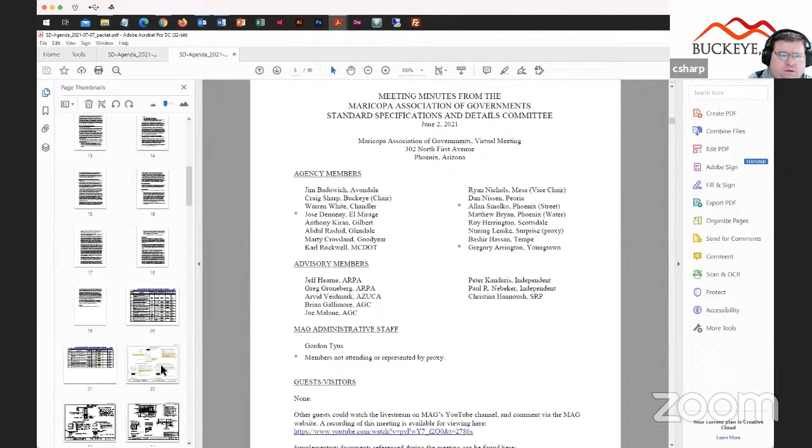Okay. So yeah, so far we've just got a couple of grammatical errors, some items for guardrail and meter vault cover revision. So if nothing else is there, we'll just move on. Item number 5, update to detail 212, the utility pothole repair. If I remember my emails correctly, I don't think Arvid was going to be here. He had a doctor's appointment. I think he is here now. I saw him in the list. Okay, Arvid, are you on? Yeah, I'm here. You are, okay. Do you want to talk about this?

Sure. So we've got in front of you the MAG 212 revision that's gone through the working committee and been passed around to various agencies for review. And so it now completes the desire to have a temporary pothole requirement, and then also the 212 detail for the permanent replacing and repairing of a utility pothole. And again, the temporary is going to be limited to primarily construction time, and then anything else to be a MAG 212 permanent detail to repair the asphalt if we're doing SUE work.

Okay. Jim, did I miss anything? Yeah, I think we also routed it to the AUCC. Isn't that right, Dan? We didn't get any comments back from them. That is correct. Say that again, I lost you. So Dan ran it through the AUCC committee, and we didn't get any comments back. Yes, that's correct. Thank you. I forgot about that. I think we did a good job here. Yes, I agree. I feel it's been very well vetted.

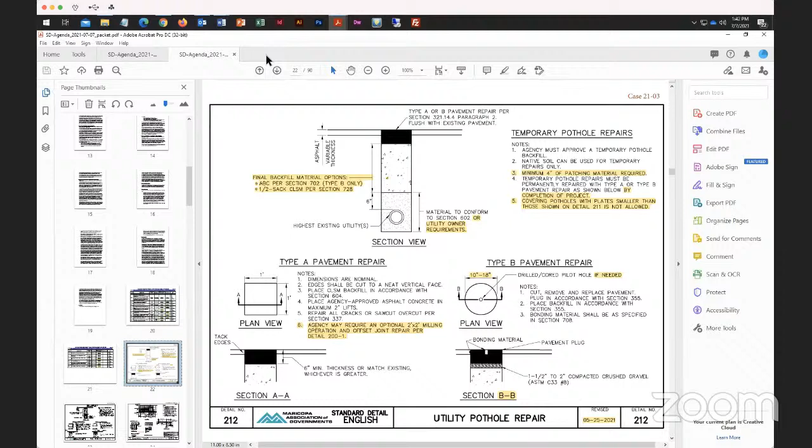Can I get a motion? Yeah, this is Karl. I'll make a motion to approve the detail change, 212. Thank you, Karl. And a second? Buckeye will second it. So we'll go through a roll call vote here.

Here we go. Avondale? Yes. Buckeye is a yes. Chandler? Not present. El Mirage was not present. Gilbert? Yes. Glendale? Yes. Goodyear? Yes. Maricopa County? Yes. Mesa? Yes. Peoria? Yes. Phoenix? Al Smolko, yes. Thank you. Scottsdale? Not present. Surprise? Yes. Tempe? Yes. And Youngtown? Not present.

Okay. Case 2103, the updated utility pothole repair detail 212, passes with a majority of yeses. Moving on. Thanks, everybody. Thank you, Arvid. Yeah, thank you guys. Appreciate it. It was good working on it. We'll try and find another one to get started on now.

All righty. Well, moving on to item number 6. It's proposed details, case 2105, proposed detail 529-1 and -2. It's a curb opening catch basin detail, City of Phoenix P1569. So this is one that I'm bringing up; basically this is what the City of Buckeye uses for all of our catch basins. City of Phoenix has used it forever and ever.

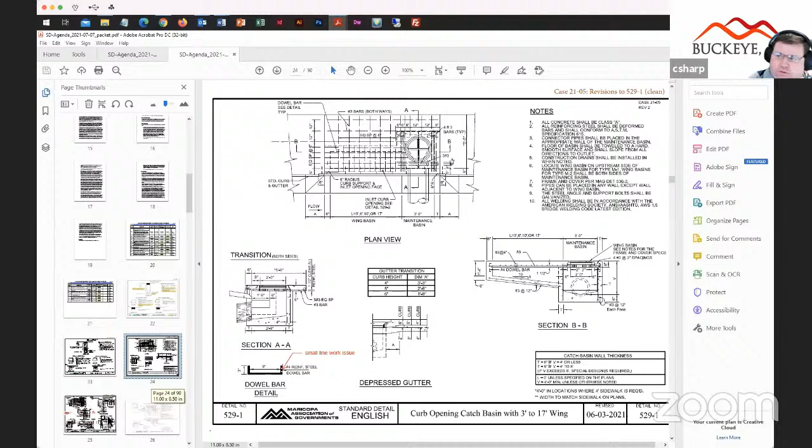When we first proposed this, the county had some comments on adding some reinforcing and revising some line work, which is what you'll see in the drawing in front of you, and we cleaned up some of the dimensioning on there. So those are some of the changes. If you can go to the next one, Gordon. When I was looking at it, I was finding some things on the original drawing that probably need to be cleaned up down in section AA. It looks like it's dimensioning from finish grade to the bottom of the deck.

Looks like that should be a total of 8¼ inches with a 6-inch top and 2 inches of material native over top of that, with 1.5 inches of clearance from the top of the concrete down to the reinforcing.

That's just section AA. The access frame and cover, the little hook that's actually shown that's welded on the frame itself. I talked to a few foundries and they don't do that at all. It's not even manufactured like that. Not quite sure why that was there to begin with. If anybody has any insight, I'm definitely open to understand what that would be there for. But when the frame is actually installed, there's concrete poured all the way around it, so it's not going anywhere.

Go ahead. Yeah, I have a comment on the access frame and cover section there. I just added it in because it actually shows on the City of Phoenix detail, but it wasn't on the one maybe you had started with and that we were working on. But yeah, if they're not using it, it looks like it's a field thing too. They show a 3/16 weld of a piece of rebar, so it's not like it comes from the foundry that way. And I assume it's meant to anchor that frame into the concrete, so it couldn't be lifted out, or it wouldn't jump out of there with a heavy wheel load or something else.

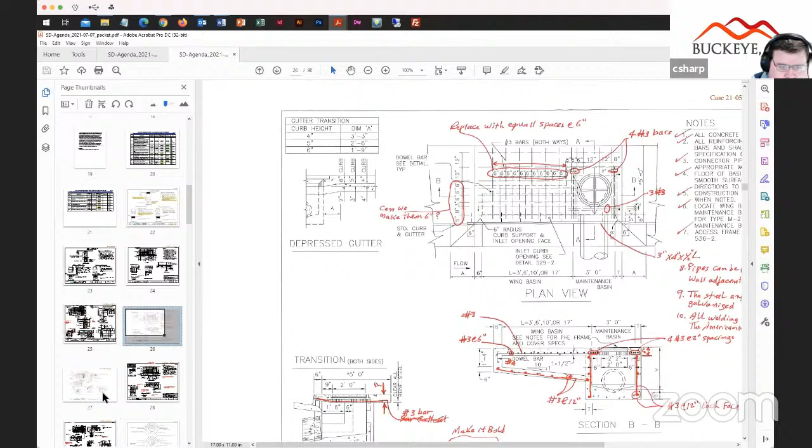Right. Gordon, can you pull up the City of Phoenix detail? Or you may not have it. I don't think I changed that when I did ours, so if it's going to be on the City of Phoenix detail, it'll be on ours as well. Okay, so it'll be on here somewhere. Yeah, there it goes. See where it says finish grade down lower left corner? Yeah, and there too. It looks like there's a little piece of grass and soil right up against the frame. I don't think we want that. Yeah, and I don't think it's actually built like that either. I believe there's concrete that's cast all the way around.

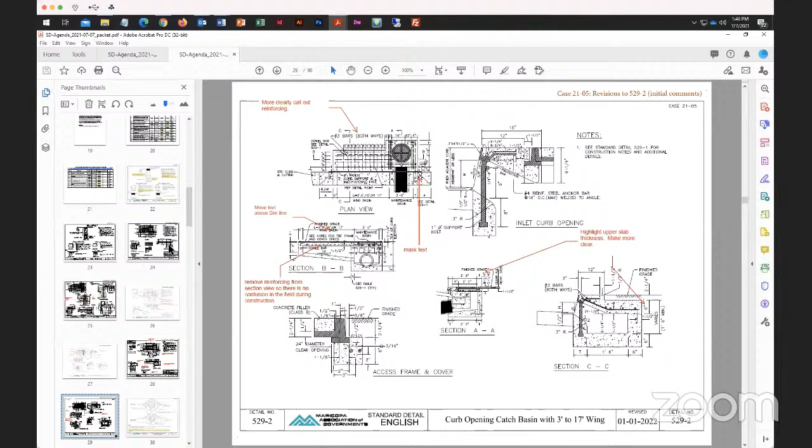In fact, if you look up in the plan view directly above that, you have that T dimension, and that's going to be all concrete. Okay. Yeah, I'm not sure why it showed that on both the section AA and the access frame and cover. It kind of looks like soil right up against it. Yeah, agreed, I think that was a good change. So that was all I really saw on this, minus maybe scaling back some of the hatching. It just looked kind of dark. Other than that, Karl, your guys did a very good job. Thank you for the help on that.

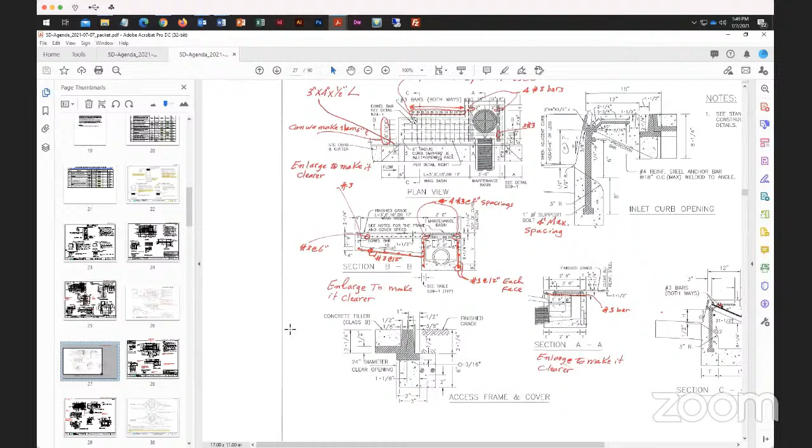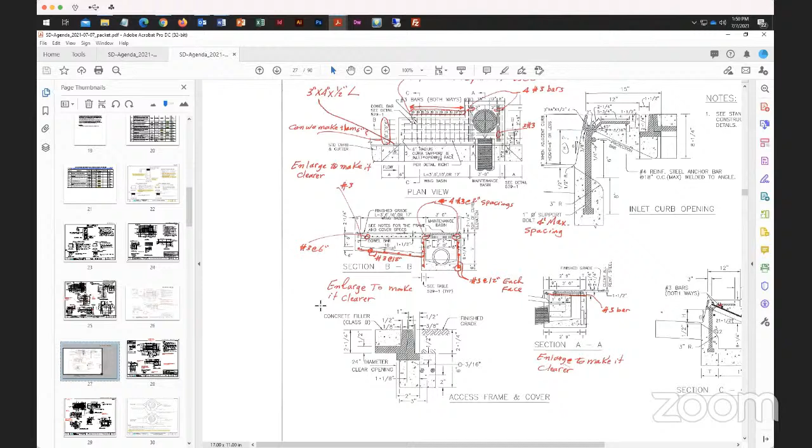If you go down to the ones that our structural engineer marked up, Gordon, I was going to cloud my detail, but I didn't. If you see section B-B, we've added rebar into the bottom of the wing and in some of the walls there, which I think is maybe conservative, but there could be a case where you have poor soil conditions or washouts where you want structural support of the wing there. That's really the only structural change. Everything else is a little more clarity, calling out some of the bars that might not be obvious, a little bit cleaner way of dimensioning. Okay.

So that was the gist of this case, basically taking the City of Phoenix detail and throwing a MAG border around it. I got our thing to you guys about a week ago, so some of you may not have taken a good look at this. I don't think at this point we want to try and vote on it, but maybe by next month we could talk about it at the working group too. I think that's good, this is a good step. So does anybody see anything? Any comments, concerns?

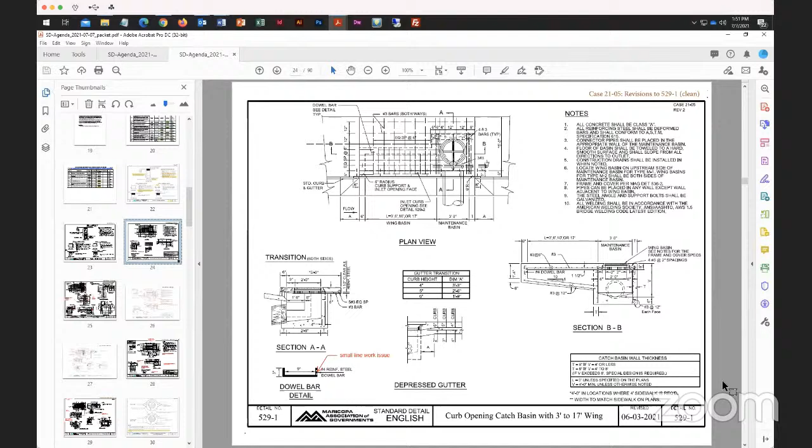One other thing, when you make the updates, you might want to make the text in the title block the same as the second drawing instead of this Roman. Okay. Oh, by the way, Carl, can you send me that CAD file and I can take it from here? You guys did the bulk of the work. I really appreciate that. We're working in MicroStation, so we can't get exact MAG drafting standards when it comes to some of those things. So yeah, we'd be happy to send you the CAD files. Perfect. Thank you very much.

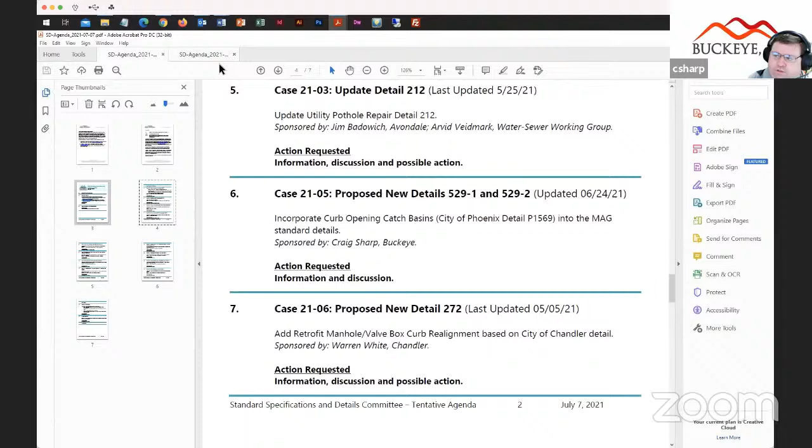Okay, not hearing any other comments on 2105. If we can move down to item number 7, it's case 2106. It's the proposed new detail 272 retrofit manhole valve box realignment based on the City of Chandler detail. Warren, you've got this one?

Thanks, Craig. Hello, everyone. As Craig mentioned, this is a new detail for retrofitting manholes or valves in curbs, whether it's an outer curb or the median curb. And really haven't had too many comments in a couple months. This has been discussed in the water sewer working group. Unless there is anything new or anything to discuss now, I'd move to accept the case as presented. Yeah, and it's definitely up for action. So, is there any other comments on this?

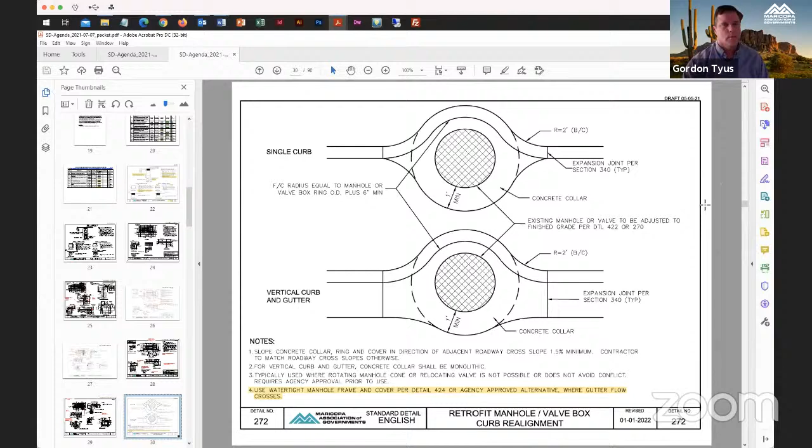Not hearing any, Warren. Can I get a motion? I'll motion. Thank you, Jim. Can I get a second? Second. I'll second. Thank you, Dan. Okay, Avondale. Yes. Buckeye is a yes. Chandler. Yes. Thank you. El Mirage is not present. Gilbert. Yes. Sorry about that. Oh, you're good.

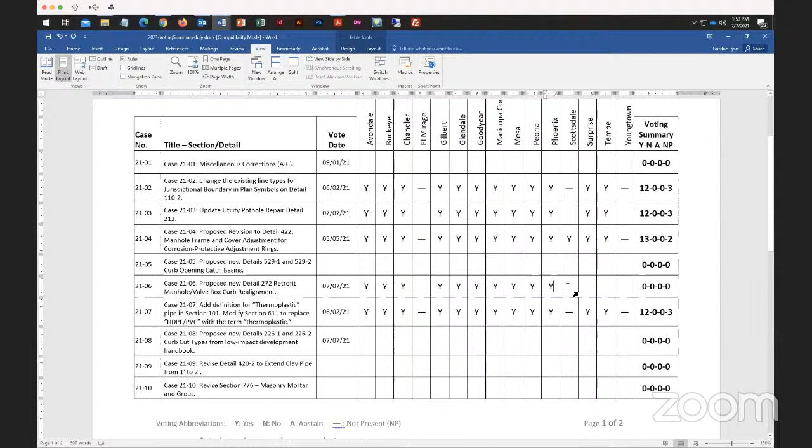Thank you. Glendale. Yes. Goodyear. Yes. Maricopa County. Yes. Mesa. Yes. Peoria. Yes. Phoenix. Al Smolko, yes. Thank you. Scottsdale. Not present. Surprise. Yes. Tempe. Yes. And Youngtown. Not present. All righty. Motion carries. Case 2106, Detail 272 is approved. Thank you, everybody. Yes, thank you. Thank you, Warren. That was excellent.

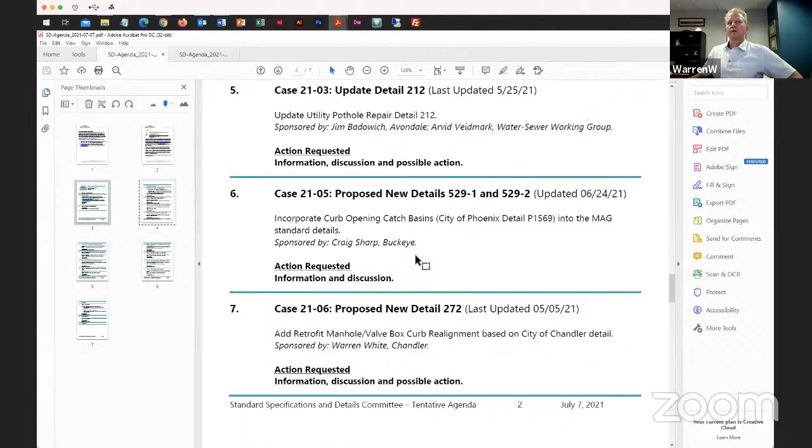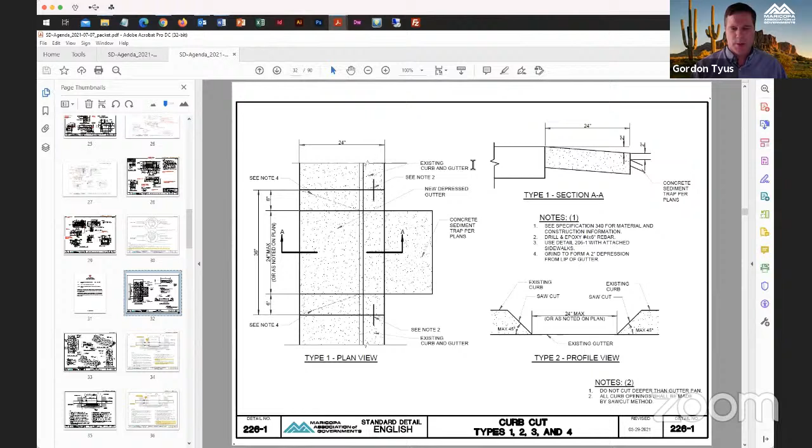So if we can move on to item number 8, case 2108, proposed new curb cut details. These are the 226-1, 226-2 for the low impact development that the outside of right-of-way working group is working on. Alan, are you sponsoring this one? Yes. We did this with Keith. Okay. Do you have any updates, or is this basically the same as we had the last time? Got the right one there? Yeah, Keith sent me an update that just fixed a few typographic issues. Oh, okay. It looks different, that's all. Yeah, I had no comments on this. Okay. Anybody else have any comments?

Hey, Alan, this is Warren. I had one question internally, and maybe it's accounted for here: if we had a roll curb situation, is there anything that we note as a transition or anything in that case? Use this in a roll curb? I'm not sure about that, but if you look at type 2 profile where it goes down, it seems like if you had a roll curb, it would be not a straight line. It'd kind of follow. I don't think it's detailed like that, but I don't see any objections to a roll curb.

I would wonder, assuming that in areas where you're going to have 6-inch curb, you're going to have drainage issues. And typically where you've got vertical curb, you're on a more major road, where local roads are typically the only thing that has roll curb. I don't know if that would be the case. Yeah, probably. Then you have to look at, my cursor doesn't work on the screen here, but where you've got that vertical curb and that transition where you just go down on the slope, you'd almost want to do that almost like a radius or something.

So depending on your sections or how you pour the roll curb, it may be a different transition that wouldn't look good. So you wouldn't want to do it on a radius. You just kind of flatten it, you know. I would almost think that would be a separate detail. You'd want to look at something before you let a contractor go on it. Yeah, because that's going to change quite a bit of what's drawn here.

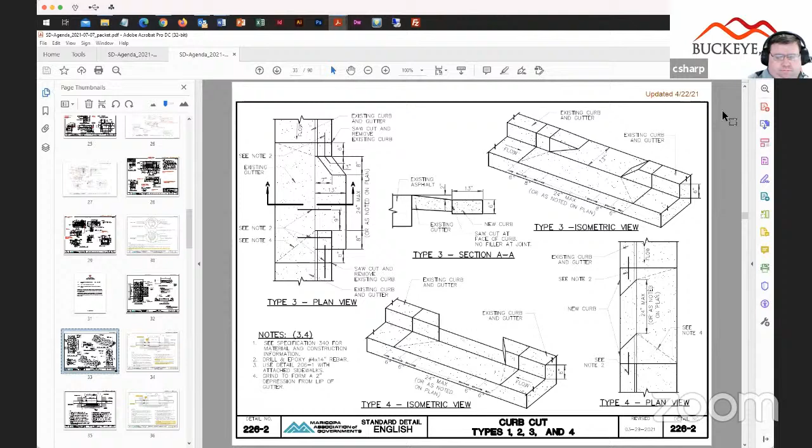Again, why these don't need to be that efficient. It's just going to be a little bit of drainage. It's nuisance drainage more that goes into these. I think I'd agree. I've been looking at these details and I'm seeing 4 different types, which seems like it might be a little bit of overkill on what we're trying to accomplish here.

And when I look at each of these, type 4 seems to be the one that makes the least amount of sense from a long-term maintenance standpoint. I agree we're going to end up with curbs that are going to have issues being broken, fractured off, whatnot. And from an efficiency standpoint, I don't know that really provides you any more efficiency than the type 2 detail. I don't know that there's any more efficiency to that.

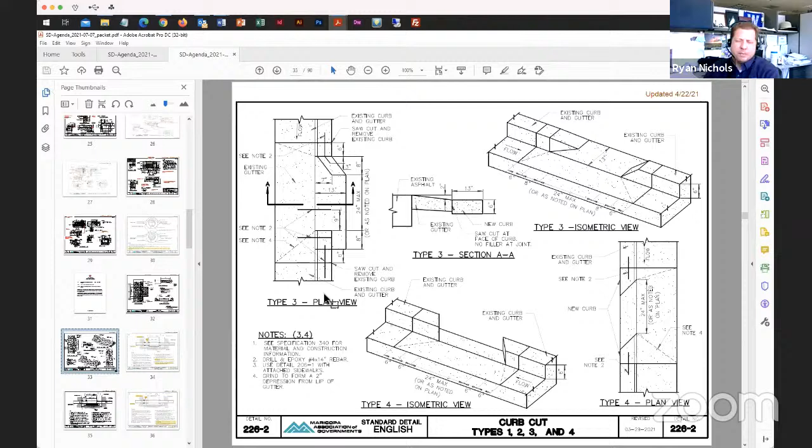I would agree. Yeah, I'm a little curious about type 1 versus type 2. Are they the same type? I'm just looking at the profile view of type 1. Looks like type 1 doesn't have the actual curb. To me, it just looks like it's gutter, where the type 2's got a gutter to it, if I'm looking at that right.

No, there's a curb there. But I'm not seeing the difference. That's what I'm trying to figure out. Is it? I thought maybe it's just a type 1 profile view as opposed to a new type.

See, I do think these details could use a little more refinement. When I look at type 1, referring to note 4 there in the notes section, it notes to grind to form a 2-inch depression from lip of gutter. So to me, type 1 involves a little bit more work where you're depressing the gutter, which will increase the efficiency of the capture. Whereas type 2, the detail's pretty limited in what it shows, but I've interpreted that as a curb and gutter where the curb just terminates.

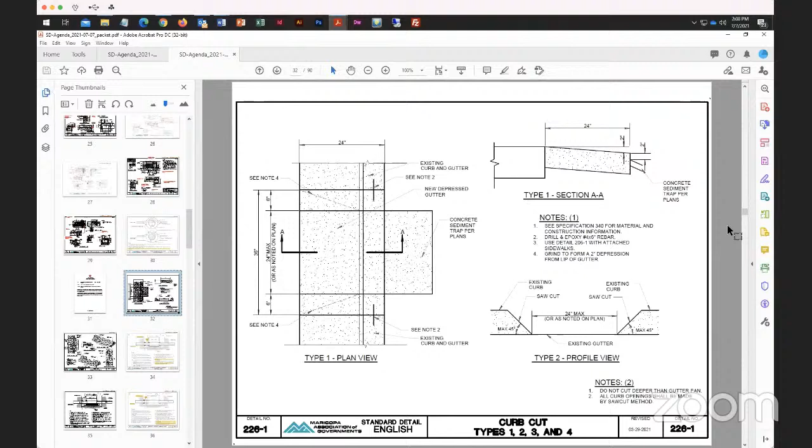Yeah, Peter, I'm taking notes also, and I'll send something up to Keith. And we also will have this meeting posted on YouTube if you want to review the comments that were made now. Okay, thanks. Any other comments on this?

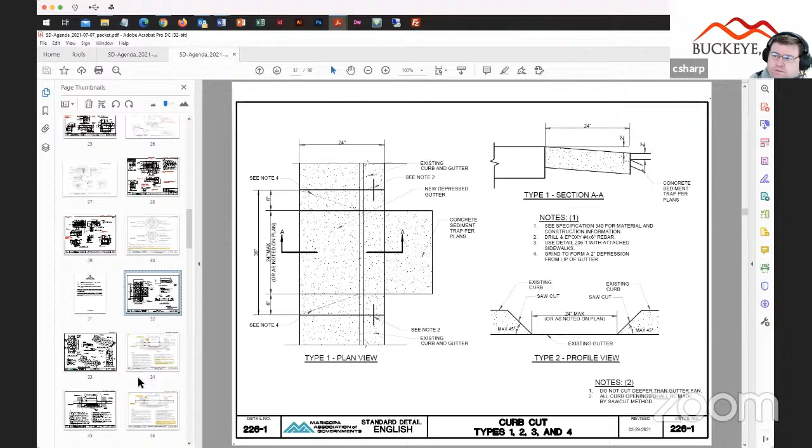Not hearing any. If we can move on to item number 9. Case 2109. That's revising details 419-2, the polymer, and 420-2, the precast manhole bases. Showing the longer pup coming out of the manhole, just to avoid conflicts.

Matt, do you want to take this? Or is Matt on the line? Yeah, I'm here. Can you hear me? Oh, there you are. There you go. Yes. Yeah, everything on our end looks good. I like what I'm seeing. I don't know if there was anything that you had, but I think everything up to this point looks very good.

Yeah, and just kind of for everybody, we had the president of the Clay Pipe Association come through, and he was actually the one that redlined this and made some of the changes. So this is all basically out of the NCPI manual. I wanted to mention also that 420-2 was the one that you saw last month. And the only change to that one was during the working group meeting. I think Jim suggested making 24 inches kind of the minimum distance here, because there wasn't a minimum. And without any minimum, you might have the same problem where you had the interference before. So that was added to this one.

But the other issue that the guy from the Clay Pipe Association brought up was that this other detail 419-2 for the polymer manhole base basically would need the same changes made. And so that's what these marked up things are, basically the same changes for the polymer base. Okay. So sounds good. Any other comments, questions? Thank you for all your help on that one, Gordon, too. Thank you. Sure.

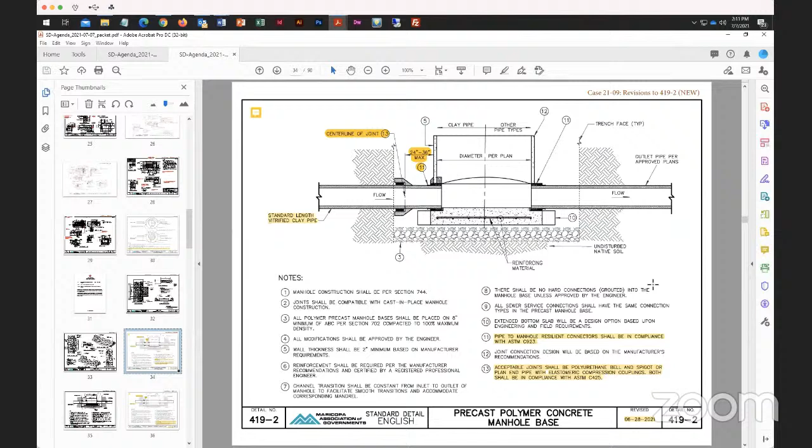It specifically says to use vitrified clay pipe. Is that the only pipe that everyone's using? So the intent of this is, if you look at the top of the manhole there, we've got one side showing clay pipe and the other side showing other pipe types. Being that clay is a little bit more finicky, we've got to do a couple extra things for that. But we did try to break it out so it was clear as to clay and anything other than clay. Thank you. Excellent question. Any other questions?

So Matt, I don't want to speak for you, but since we're not really hearing anything, we've gone through this a couple of times, through the working group a couple of times. You want to set it up for action for next month? That sounds great. I think it's ready to go. I agree with that. So yeah, Gordon, if we can put this on the agenda next time for action. Okay. So, but thank you, Matt. Excellent work. Thank you as well, Craig and Gordon.

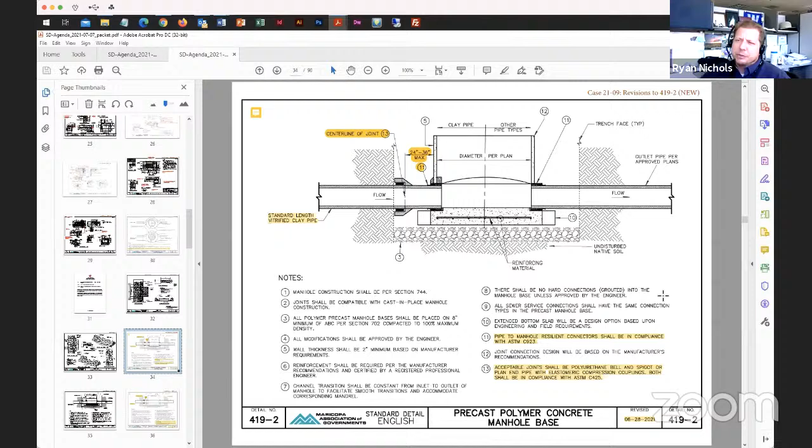Craig, is the only change on this on the vitrified clay pipe side? There's no other changes to this detail? That's correct. And I don't know if Gordon can kind of hover over the joint for the clay pipe. That was the biggest problem. If you notice how the joint descends below what that anti-flotation ring is right there. So what we had on there before is a 1 foot. So with 8-inch pipe, we didn't have this issue, but anytime you got any larger diameter pipe, the outside diameter of that bell was in conflict with that anti-flotation ring.

Right. So talking with NCPI, they were like, hey, we can go up to 36 inches. We just have to have 2 points of flexibility within 36 inches. So the boot at the manhole being one and the joint within 3 feet being the other. So we meet all of their standards, and that actually solved the issue with the conflicts with the anti-flotation ring. There was one other change that he made, correcting some of the references to ASTMs. If you look at note 11 here and here, it's both pointing to the joints or the resilient connectors. So this was corrected for both sides. Yeah. Okay. Thank you.

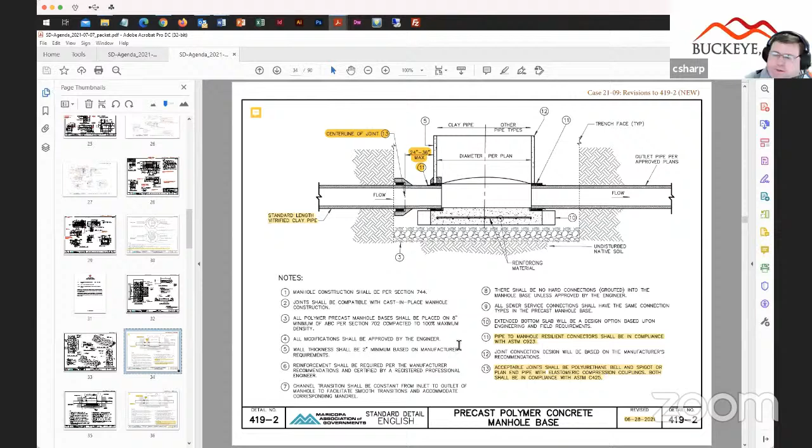Well, if there's no other questions, we can move on to item number 10. That'd be case 2110, revising section 776, the masonry mortar and grout. Update allows commercial ready mixed grout and factory pre-blended options, rewording of the cementitious materials, and ASTM updates. Jeff, are you on? I am. Take it away. I've gotten no comments, Craig. Okay. Unless anyone has any other comments, I'd like to put it up for a vote in August. Are there any other comments out there?

Not hearing any. I think we can definitely do that. Put that up for action next month. Great. Thank you very much. Thank you, Jeff.

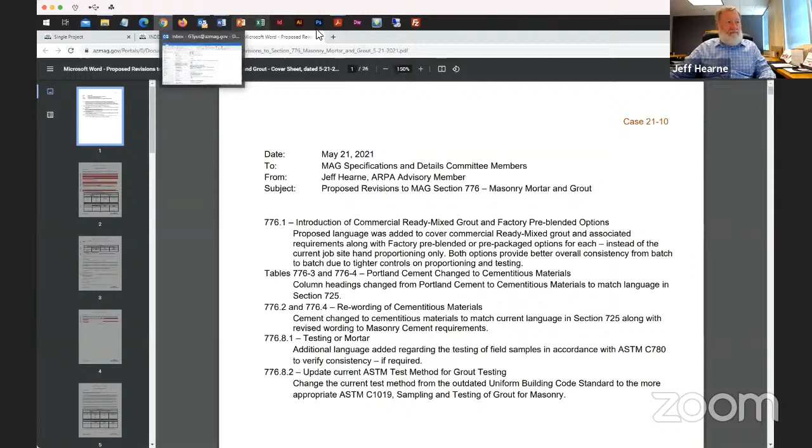All right, moving on. Item number 11, case 21-11, revising section 611 to add requirements for potable water hauling. I know that the water and sewer working group has been working on this for a while. Addition of potable water hauling requirements, adding sections from the AAC statute. Jim?

Yeah, I haven't had time to revise this. I'm going to try to get something for the working group this month. So. Okay. I just got to sort out what specs are being referenced and make sure everything lines up with what the AAC says, and then this other environmental health code says. So. Right. Okay. Anybody else have any comments or questions on it? Okay. Well, look forward to working on this in the working group. Thank you, Jim.

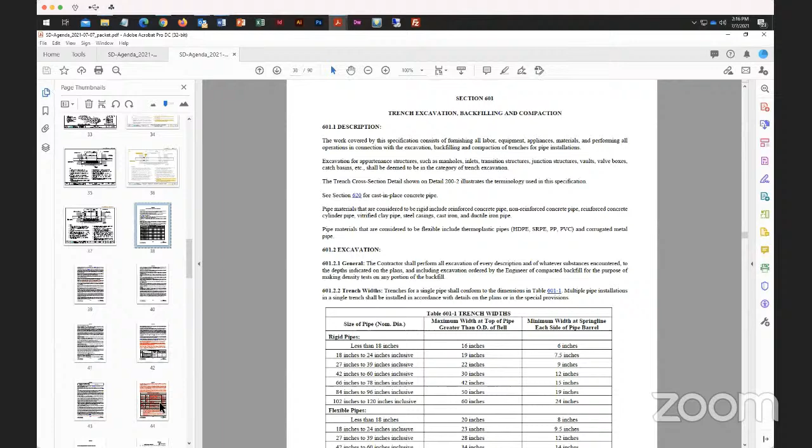Moving on to item number 12. Case 21-12, revised section 601 to add minimum testing frequencies. Summarizing just testing frequencies for trenching compaction testing. Jim, this is yours too, but I believe Rob was the one handling it, right? Is he on? Yeah, he's on. We didn't do too many, just did some small revisions, I think, right, Rob? That's about it. Yeah, that's correct. There's not many changes since the table. In fact, nothing's been changed on the table for a while.

It was some potholing language that Rob Duvall of Phoenix wanted to add, so he's piggybacked onto us. And after talking to some other people about the potholing language, I kind of took everyone's comments, and that's what you see just above the table with the potholing. This kind of meets the intent about who chooses locations and when it's done. Okay. And I put a little bit in there above that, just about where this foundation is scarified, just the contractor to go back and compact it.

And I talked to somebody from one of the private labs and figured that would probably be enough, just having someone go back to compact the foundation without getting lost in the weeds about what kind of compaction you bring it to, or if you go back in there and test it. It's difficult because the moisture may not be there, and it could open up a can of worms. So it's kind of just a methodology to have the contractor, if they over excavate or if they scarify, just go back and compact it and leave it at that.

And the other thing is bedding, too, in here. Bedding was always kind of thought it could be clarified at first. Looking at the bedding information in here, I think it's best to leave it like it is for now. Okay. There was one thing we did is clarify this over excavation. It was unclear what's considered over excavation.

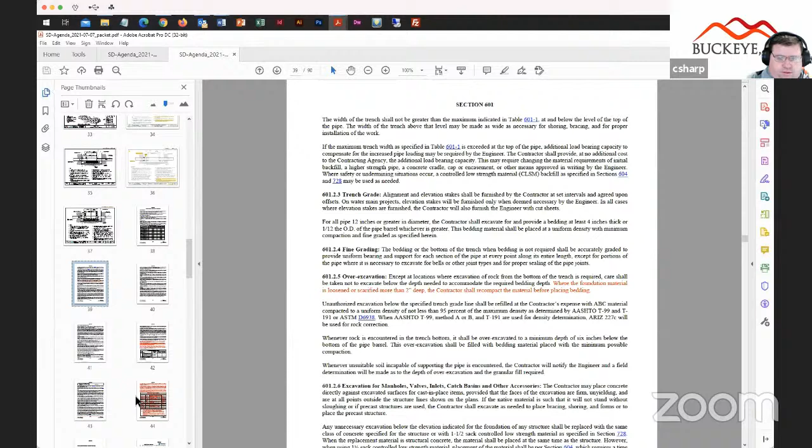I just thought it might make sense to have something in there so that we, as an inspector, could point that out if we saw it. Yeah, that's good to be able to say, hey, you're loosening it up, just tighten it up a little bit. There's not really a requirement, just saying make it flat and tighten it up. Nope. Yeah, exactly. Yeah, this is Warren. I agree. That's a great addition, Rob.

Good. Well, we've just seen some really sloppy excavation, to be honest with you, and we need to address that. Some of these guys are over excavating, and so then it comes down to the inspector interpreting, well, maybe you need to bring in ABC. So this way, we just wanted to clean it up a bit. No, this is good.

Well, this is Peter, the anal geotechnical engineer, looking at this going, do you want to include moisture condition or moisten? Of the foundation? Well, just the idea where you're going to recompact. I hate seeing dust recompacted dry. Yeah. And that's kind of what I was thinking. If you have them go back and compact it, and if you spell out a certain compaction, native compaction is like 85%. They can get that, but if we start processing it and then we're getting testing, it would.

I didn't want to get too deep in the weeds with it, but I know what you're saying, Peter. I agree. You're compacting dry material, but at least there's some kind of effort to do something. Yeah, I grab that. I didn't know if you want to add just the language, shall moisten and recompact. That's a good point about moistening it. Yeah, don't even have to go to moisture conditioning, just moisten. Just get some water in there.

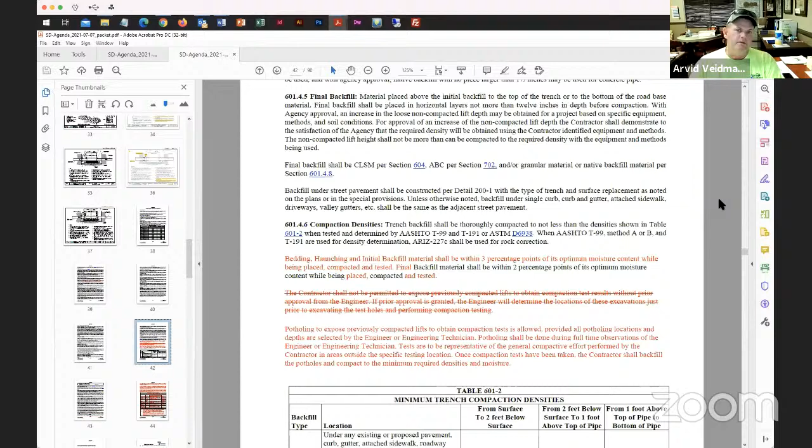Yes, and all I'm saying is in today's world, the word potholing is more broadly used and accepted, and it defines a methodology. So if you change potholing to test pits, then somewhere in there just make sure you add the phrase no hydro excavating will be allowed. Okay. That way you're completely covered and nobody can say, well, why can't I use my hydro truck? Yeah, maybe we can make it excavating test pits and use the 2 terms interchangeably to clarify it. I've never had anyone that I can recall trying to use any other method to provide a pothole to test compaction, but I guess it could happen.

Well, when it does happen, you'll be ready for it. Yeah. That's the whole point. They're going to say, well, MAG doesn't say. Exactly. And you're like, no, it does. I wrote it myself. That's a good point. I'm glad you mentioned that about no hydro.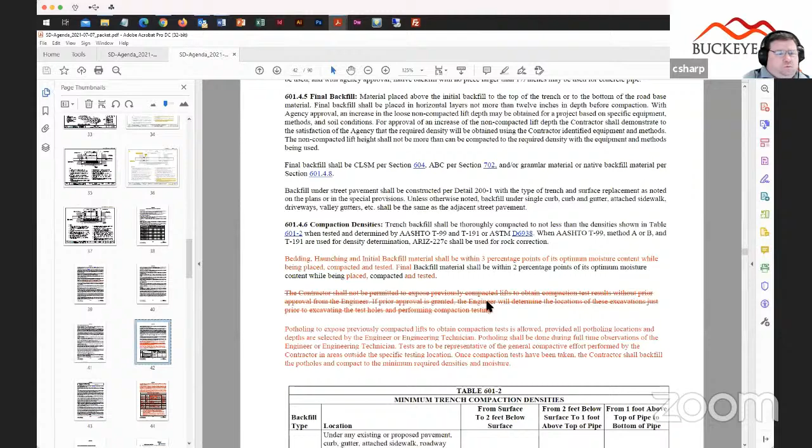Just no hydro. No hydro excavating. Excavating. Okay. Yeah, no hydro excavating. And then you've crossed the T's and dotted the I's and you're done. So if we called it a mechanically excavated test hole. There you go. That even narrows it down even better. So we're not saying, okay, you can't use an air lance, you can't use a water lance. You are going to use something that is mechanical to excavate. Sounds like a winner. Okay.

Rob, this is Peter. I just sent you some language that we've used for some other specs. I just emailed it to you. Maybe that'll help. Oh, excellent. Thank you. Sure. This is an amalgam of 4 or 5 people's comments. So it's a combination. This will be good to clarify it. Good dialogue, though. All right, yeah, Rob, so let's get that revised for the next working group meeting.

And I don't know, any other comments? I know we vetted it pretty good. We had pretty good response from everybody, so. And what's nice with this one, Jim, is, you know, we've also created somewhat of a semi working group for this case specifically, and we've got industry involved, and Rob's doing a fantastic job on all this. So, I mean, this is a culmination of a huge amount of data. Yeah. Yeah, no, it's good.

It creates a baseline. That's the thing, is that there wasn't really a baseline for either the consultants, you know, to prepare their bids. And so this kind of just gives an idea of, you know, we get some baseline for testing. Yes. Again, you know, it depends. Depends on the material, depends on the circumstances, depends on the contractor. You know, it can be varied a little bit, and that's what the inspector can do. But you got to have a baseline. And that was really what drove the start of this, is that we need a starting point.

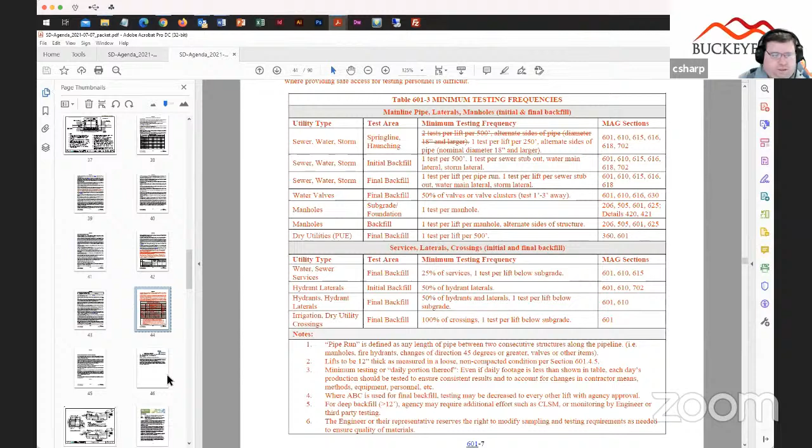It's also been run through 2 of the working groups, in addition to the subgroup that was working on it. So yeah, so it's got a lot of vetting. Yes. Yeah. I've gotten feedback in each group, which is really good. It means it's come a long ways, definitely. And very needed. So I don't see anybody else. Any other comments?

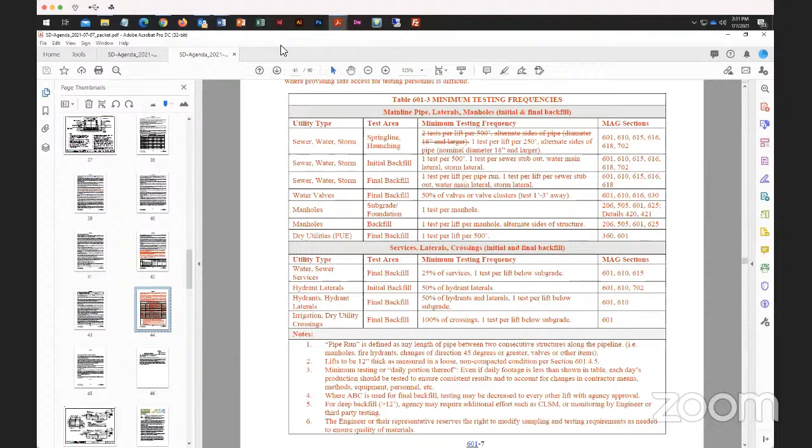Jim, this is Brian. I got a few comments from contractors that I need to get to you. The first one is just above the table, if whoever's controlling it can scroll up. They called for the backfill of deep trenches, the engineer may require additional measures such as the use of CLSM or full-time monitoring of compactive effort. I'm getting comments in regards to the engineer having that ability, and how does a contractor bid that at the engineer's discretion or reserves the right?

Well, it's come out of some situations I've seen way back in the past where we've had settlement for some really deep backfills, and the city I was with at the time didn't have the money to afford full-time observation. They actually had someone maybe 20 hours a week observing the backfill, and it was a major issue with settlement later. I think they still have settlement issues 15 years later. And now we've had a situation where we got our project, 22 feet deep of backfill, and every time I pulled up, I had some concerns about the backfill methods, and I could not require the lab to be there full time. And it's harder to get some safety shoring for someone to get in there and test that deep.

So I think it'd be good for agencies to have the ability to require a full-time observation, or maybe slurry deeper sections. So it's kind of in there as something that I think agencies should have the ability to do. Well, I see Brian's point though too, from a contractor's perspective. So if we took that out and we just said, well, you got to follow the table, then what are they going to do for the deep stuff? They're going to have to provide shoring and get people in there safely then.

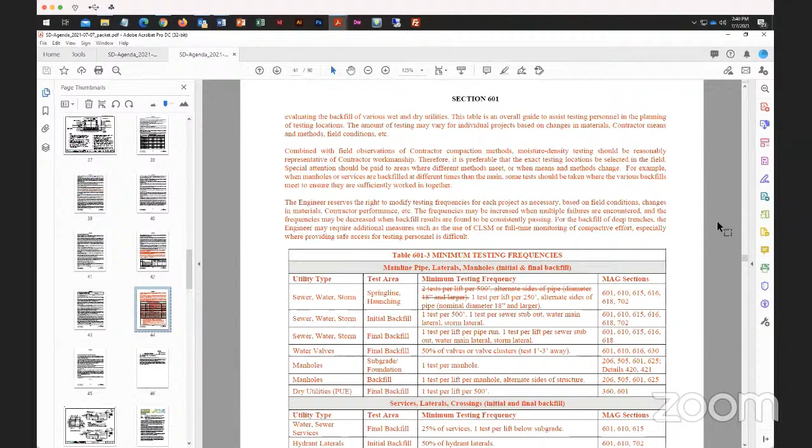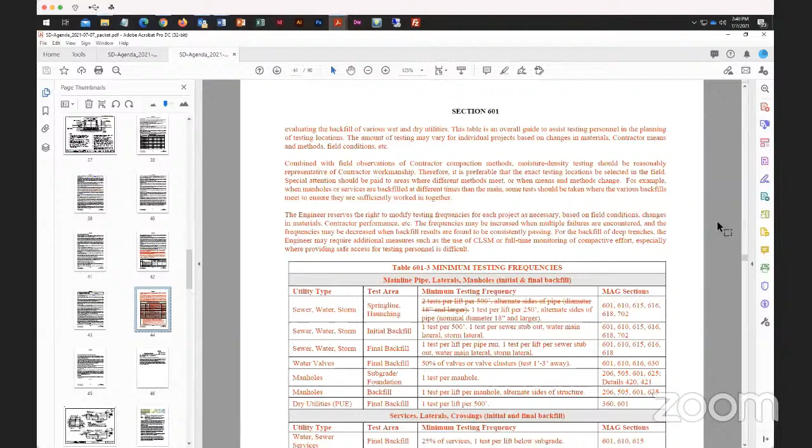Well, I think we need at least some of these, because I agree with the concerns of Brian, that you're gonna get some inspector out there who says, this is too deep, you got to use slurry. You know, that's a big surprise. I say there's a cost there, but it's the surprise of it, not planned ahead. So again, maybe some parameters need to be set, so they know, if this is anything deeper than 12 or 15 feet, we're going to have to look at it closer. Would we have the contractor submit their means and methods for deeper backfill? I don't know. Possibly. Brian, do you have any suggestions how you would like to reword this?

Well, everything that you guys have talked about would work if you wanted slurry after a certain depth. We just need to state that. So then contractors know that if it gets over 13 feet or whatever, you're going to require slurry. I thought originally when we started this, Jim, way back when, if they were gonna use native, we were gonna do more testing, but then eliminate the testing if they were going to use CLSM, to give them that choice, to kind of make them go that direction, especially at these greater depths. But I just think it's open-ended right here, unless you want to end this sentence with all CLSM will be paid by the owner, and then you guys can decide whether you want to pay for it or not.

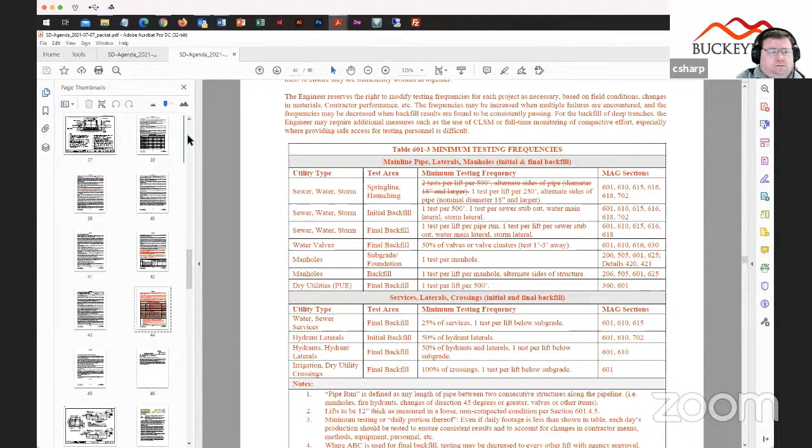Yeah. I believe that's been the intent forever is, however you do it, you got to do it safely. OSHA covers us on that. Yeah, true. I think the key is that the contractor is responsible for providing the safety precautions, though, as opposed to the testing agency themselves providing their own shoring or other safety precautions. So I think delineating not what the safety precaution is, but whose responsibility it is to provide it.

I almost want to say that would be understood because, I mean, if I put myself in the place of a lab tech, you want me to test your 25-foot trench, but you're not going to put any safety measures around there. I'm not going down there to test it. And you're not going to backfill it until you provide some safety measures for me to get down there. Yeah, and then they continue on, and then we're back to potholing.

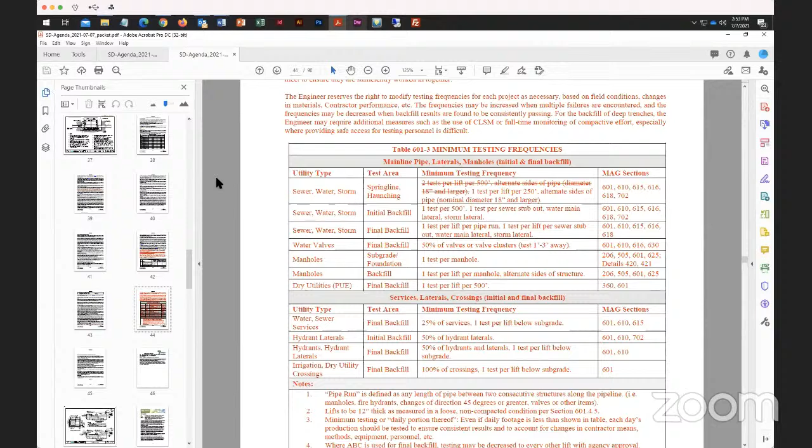All right, no, this is a good discussion. I think we need to take some of this stuff out of here and then reword it, get out of means and methods and backfill types, and just stick to the testing requirements. Okay. Yeah, you guys are taking me back to what I did 40 years ago. It's a little different then. So then do you modify the backfill spec then? We will, but it'll be a separate case. Okay. So maybe next year we can tackle that more.

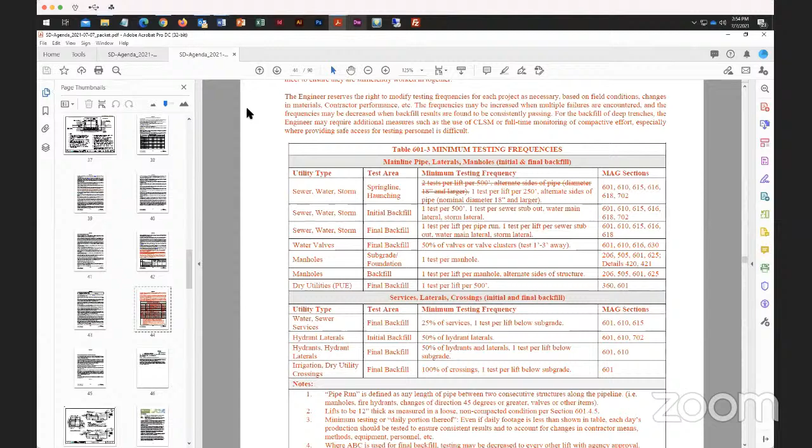Yeah, that's the thing we find with these things, when they grow legs and you end up going to this spec and changing this. It gets kind of unwieldy. That's what I appreciate, Ryan. Thank you. You need somebody to say, hey, we need to refocus on what we're trying to do, what the case is really about. I appreciate that, Ryan. Great discussion. Thank you, everybody. And Brian too. That was a good comment. So, all right, we'll work on the narrative part of this. Great discussion again. So we'll move on

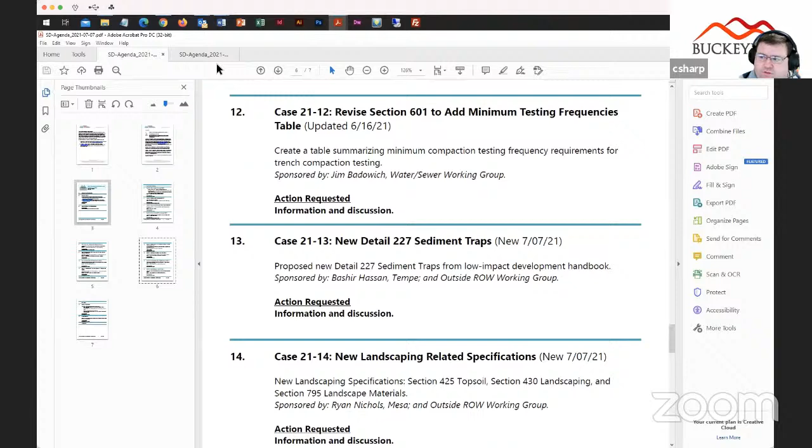to item number 13, case number 21-13. New detail 227, the sediment traps. Proposed new detail 227, sediment traps from the low impact development handbook. Bashir? Are you out there? Yeah, so this is Eric Bonds. I work with Bashir there. Okay. And Peter, I'm here too if any support's needed to explain some of this. So however you guys want to do that.

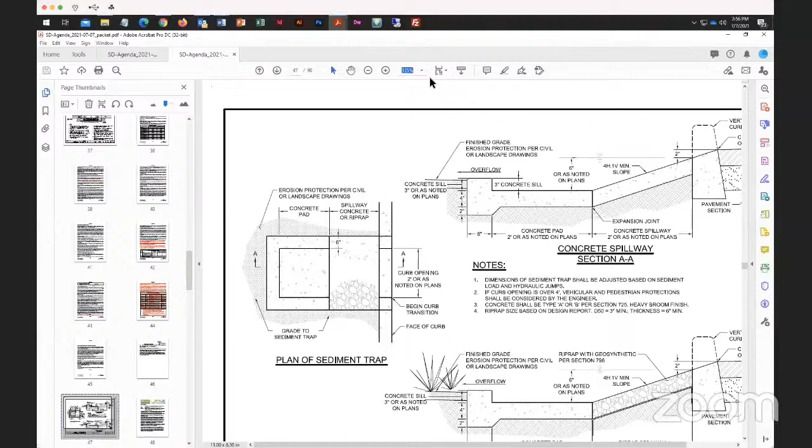All right. So yeah, I'm just gonna give a quick description of it there for you guys. The sediment traps here are essentially a spillway detail where at the bottom of this spillway is a concrete pad area in which to remove sediment that builds up, and it aims to also dissipate the flow coming down off of the spillway there.

So this is a low impact development device here. There are two different options here. One is for a concrete spillway, and the other is for a riprap spillway. It calls for a curb opening, but the actual detail of the curb opening is not a part of the sediment trap detail here.

The idea here is this comes from the outside of right-of-way working group, and the intention is for it to be outside of the right-of-way. So it's used typically for private sites and for agency developments, so like libraries and parks and that kind of thing. So if you guys have had some time to review this, go ahead and provide some comments if you can.

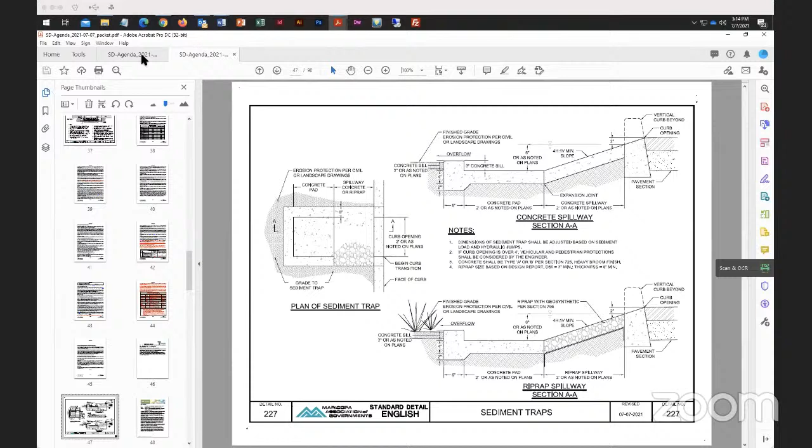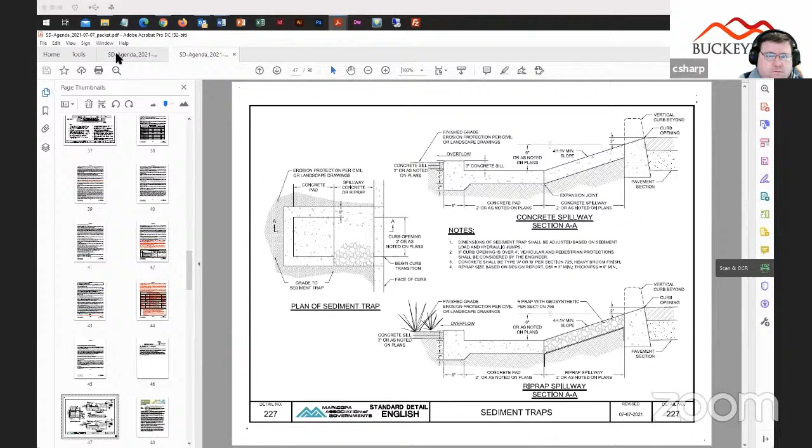And once you pull the riprap spillway and the concrete spillway sections off at section AA, then you can put a section BB in there, and you're going to show everything you need. Yeah. I think that's good. All right. Any other comments? Good discussion. Thank you, Peter and Eric.

If we can move on to item number 14, case number 21-14, new landscaping related specifications. New landscaping specifications, section 425 topsoil, section 430 landscaping, and section 795 landscape materials. Ryan? Yeah, and actually, I think 21-14 and 21-15, those two cases go together here. And I'm the least knowledgeable person about this case I'm sponsoring right now, which is why we have so many people with us that know way more about it than I do. So I'm not sure who wants to take the lead on explaining it, whether that's Peter, or Zach, or Anne, or whoever else might want to walk us through these proposed changes.

I think we'll probably turn it over to Wayne. He has done an incredible job herding all of this. How could I forget Wayne? Yes, perfect. I have to say right off the bat that this was an amazing undertaking. This was taking stuff that had not been modified in decades, and that's being generous, and really working it from the bottom all the way up. And Wayne assembled an incredible number and variety of people to help with this effort. I don't want to exclude anybody else who worked on it, but Wayne kept pushing this thing through time after time.

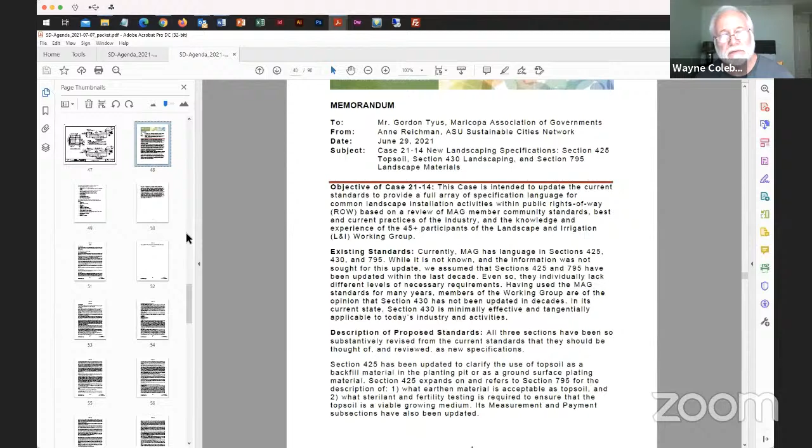Section 430, as you can see in this image, was almost completely rewritten. It has a number of additional activities to bring it current with what's current in the landscape field in terms of terminology, activities, materials, and all kinds of things. This is a primary outline of where the changes took place and the items that were incorporated.

Obviously, you guys lost me when you were talking about the trench slurry stuff. So I'm assuming you'll probably get lost here as well, or your eyes are going to glaze over. But nonetheless, these are the items, and we can talk about any of the details anybody wants about what's in 430.

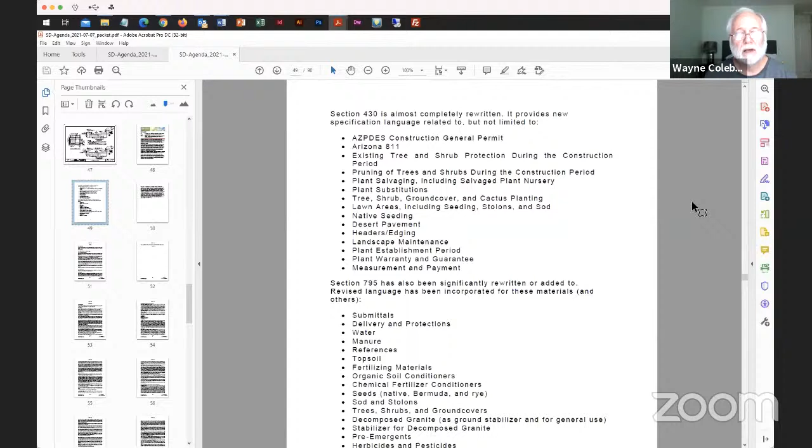Similar to 795. Section 795 basically has the landscape materials in it. You can see by this list a number of things were added, embellished, or specified more clearly. It has quite a bit of rewriting, making it much more specific to the things that were missing from the original 795. So there's quite a bit here in terms of landscape related items. Zach and I will be glad to answer any questions about the specifics, but unfortunately, the devil's in the details here.

And I will say that the committee members or the working group members have all had a chance to review these. And even Peter and Gordon got in on the reviews. And so their comments have all been incorporated, and a number of other items that were requested along the way to pick up as we completed these updates.

So I think the benefits to all of this, you know, one of our objectives was to try to develop these so that there would be a lesser need for each of the communities for having their own supplements. You know, we will, I believe, reduce the need for supplements because we will be creating the standards. There will be a lot more commonality in the terminology. There will be a lot more commonality in how activities are reviewed and in the field and how things need to be done.

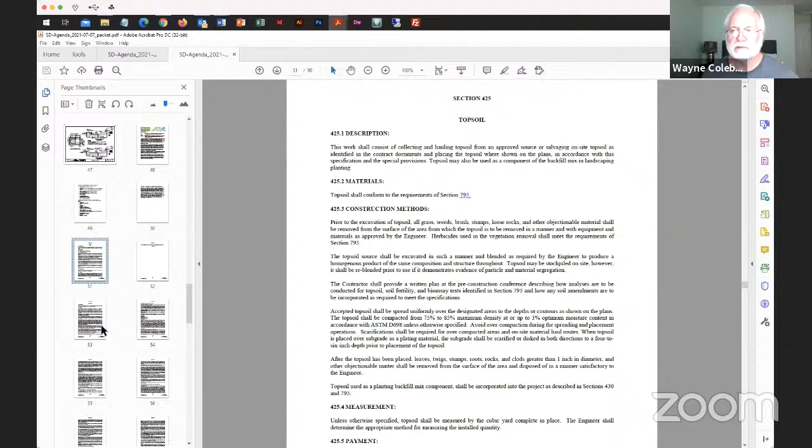But some of the things that are in there in terms of the landscape particulars, one of the new items we put in here was how to deal with trees and shrubs that may be in a right-of-way that are to be left in place while the new construction takes place. Now, there was nothing for that anywhere in the MAGs in 430, but we do have some specific things that need to be done to protect those trees, such as putting up barriers around the root zone and things like that. So if you're asking, are there things that are going to increase some cost? Yes, there will definitely be some items that, because of the specificity, will add some cost to it.

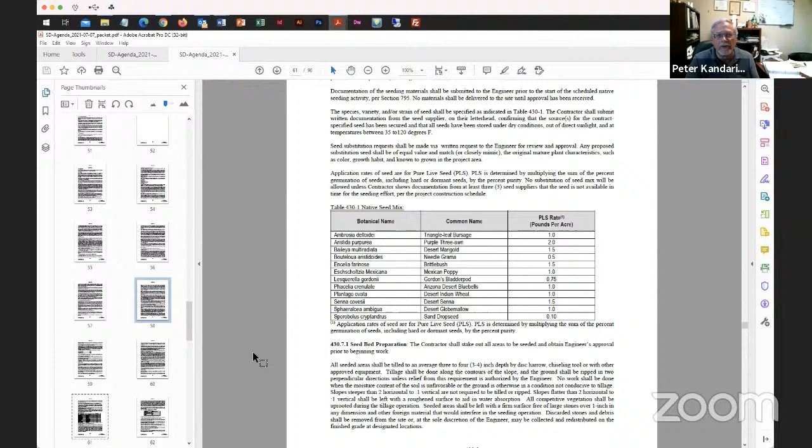And I echo some of that too, that I think there's an unbalanced savings that's going to result in certain things now that there's a lot more certainty on how do you take care of plants prior to when they're planted. How do you salvage? The goal is to retain as much so you don't have loss. And I think these really go through a great effort on showing, for at least the agency, this is what you're going to get. This is how it gets protected. And it puts an onus on the contractor to make sure those plants stay good, that the vegetation stays good, and that the owner gets what they want in the long run.

And hey, this is Warren. Since the specs were so outdated, maybe some of these things are in current practice and already being done, even though it's not currently written in the specs. Is that probably true too? Yes, yes. No doubt that some of these activities are going on now, just not specified, and so not specified to this level.

And so therefore, what happens is you end up with the inspector, the engineer in the field, having to work through some of the issues of how the contractor may be doing something that may not be preferred or preferable, let's put it that way. So this takes some of that away, and we all know you're never going to get away from having a contractor challenge whatever it is that's in the specs, but it certainly provides the inspector or the engineer the ammunition to enforce whatever's in the plans and specs. But these are, as I said, relatively common activities.

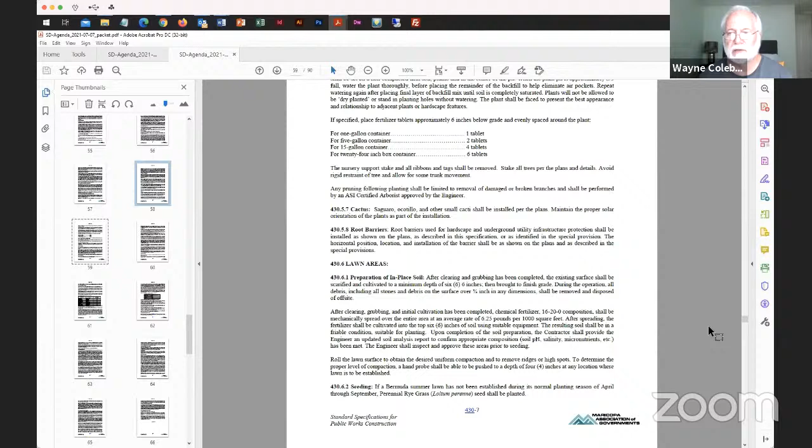May I ask a question about the establishment period? It looked like that had been touched, which is good. Thank you, Wayne, for all your work here. But one question on that that's come up in our world over the years where we've had to write some supplement language for: I see it's now 90 days. I believe the current MAG was 60. Yes. Now, this is an item some of us struggled with as to whether 60 is adequate or 90 is appropriate. Then depending on jobs, you will see even 6 months, particularly if you got a lot of salvaged trees and things.

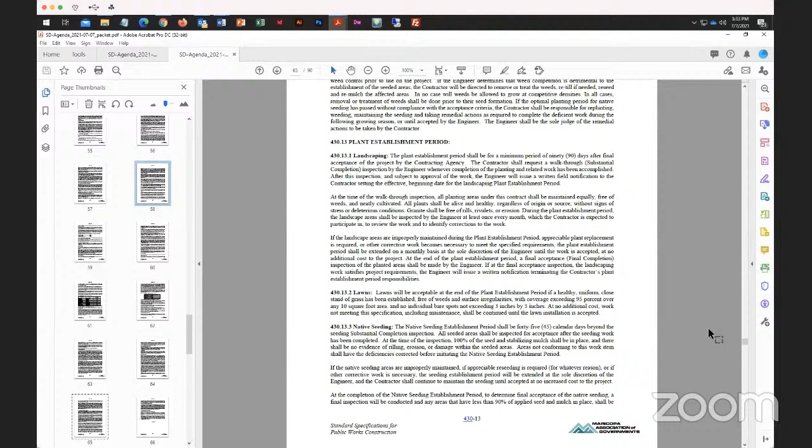The obvious recommendation here is 90 days, but certainly those who may have experience that find 60 days a more viable and acceptable time period, I don't know that there would be too much heartburn in making an adjustment like that. Well, I think historically Chandler's been using 90, but as you mentioned, there may be instances where you need more, which can be written into a contract. Right. Or even less. Yeah, that's true.

The one question I had on this: that term, the project, I just want to make sure. If we're talking about the overall project, like a roadway improvement project that includes some landscaping in the right of way, the landscaping portion of, quote, the project may be completed before the overall project is completed. And where we've had some issues is where acceptance of the landscaping is done, and that sets the date of the warranty period, where final acceptance of the project may be down the road a bit.

And that leads to some of the landscaping having issues, maybe some trucks driving over it. So the preference is that the word, the project, means the final acceptance of the overall project sets when. So I didn't know if we needed to clarify that, because that has led to some questions. Yeah, that's a good point. The project is different than the landscaping. The landscaping is a component of the project. So you're absolutely right. We probably do need to clarify what is meant by the project.

And I'm glad to hear about the issue that you've seen, because in most cases the project wants to be accepted and the landscaping still isn't finished. That's a more common issue that we see, but we probably need to flesh this out a little more just to address those particular issues.

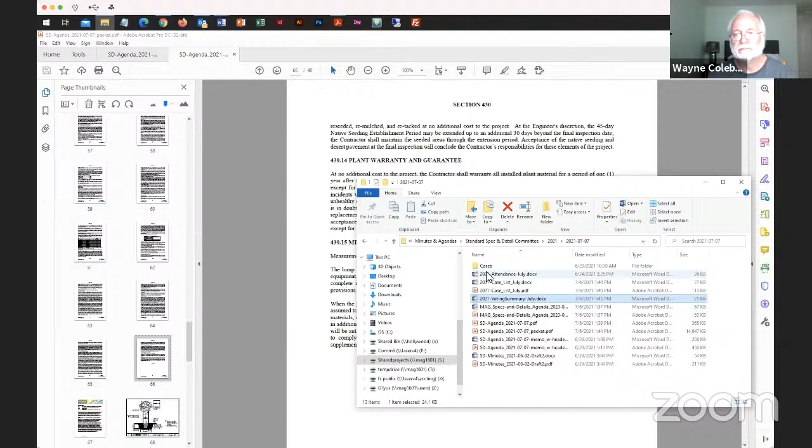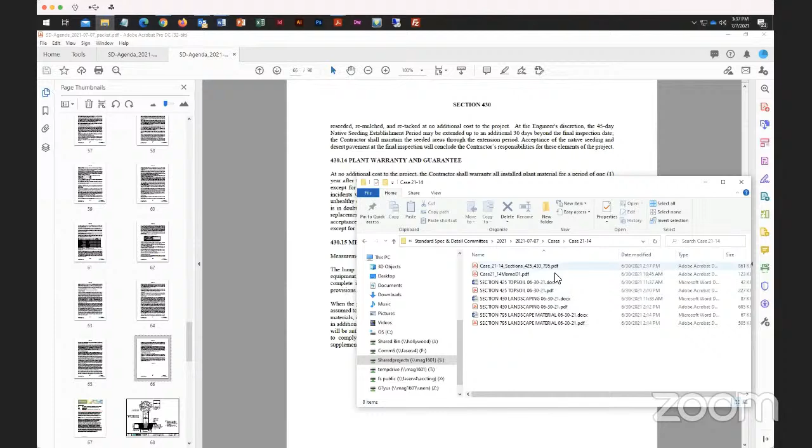That's a good point, Wayne. I know that did come up, that project closeout is held up sometimes over this. Right. Final payments and everything else. Yep. And contractors aren't happy with that. No.

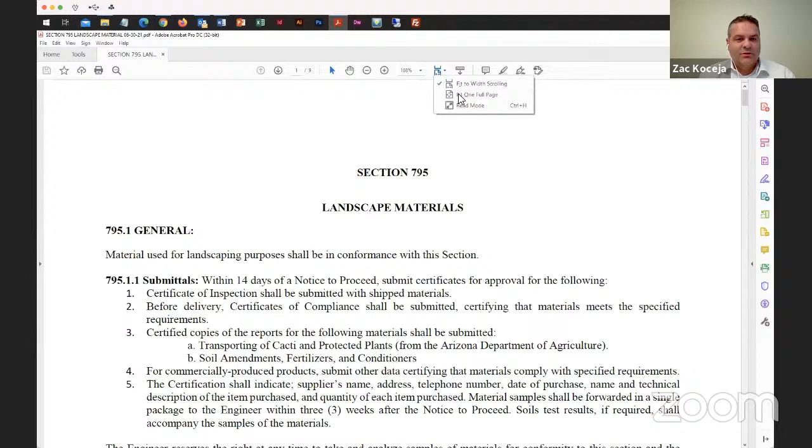And Zac, feel free to mention anything else you feel is relevant here. Yeah, I just want to say you did a great job with everything we've discussed as a work group. Just putting emphasis on, I can also attest, at least in Mesa, that the majority of the things in these sections are currently being used. They're just being implemented through supplemental specs from the different cities or agencies. And that's why we, as a group, thought it would be so important to try to get as much of that into one area.

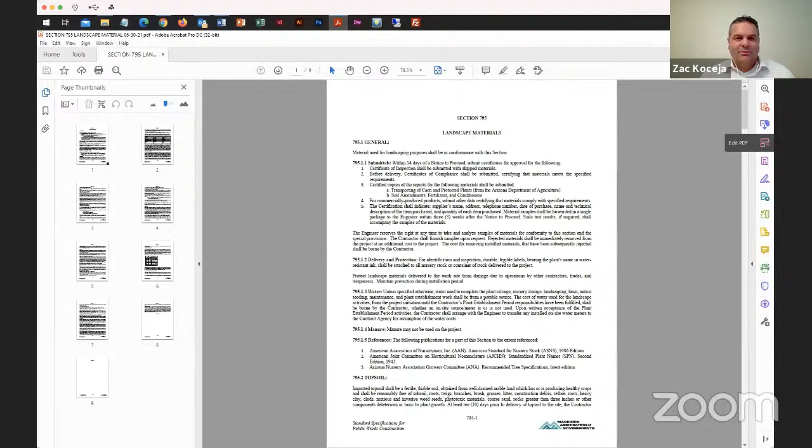So there's consistency among the different municipalities, consistency within the industry. But yeah, Wayne, you did a great job covering everything. So thank you.

Just one other point I'd like to make here is in the 795 section, you'll notice the topsoil is at the bottom of page 1 there. What we tried to do is to make the topsoil definition the same between ADOT and MAG. They're very close. Peter, you're probably going to focus in on that one, but the idea here was to establish common terminology and common materials. It doesn't make any sense to have MAG and ADOT describe topsoil and have them be two different things. So the thinking was we could make them both the same and simplify it for everybody.

And I believe the differences were pretty minor. It was something like percentages passing the number 40 or number 100 sieve. I don't really remember that one, but the differences were relatively minor. I wanted to add that Peter is correct. I neglected to put section 795 in the packet. So I'll add it as a linked file on the MAG web page so that you can take a look at it.

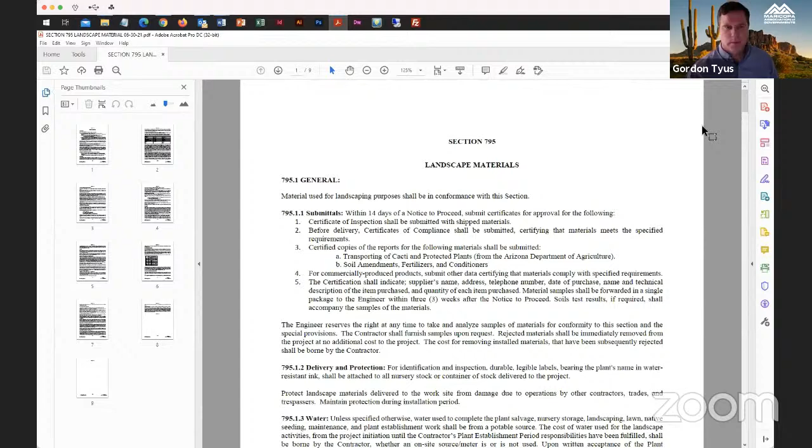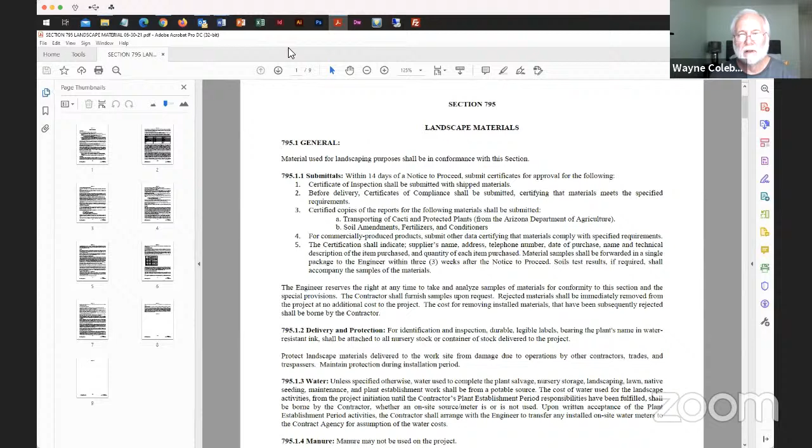Okay. Well, thank you, Wayne. This is a pretty substantial undertaking. Well, I don't want to take all the credit because Zac's done a yeoman's job as well. And there are others who have worked on this and provided ideas and suggestions. So it was a group effort. Okay, well, very well done. I'll get it out to our different departments and see what we can do with it. So thank you again.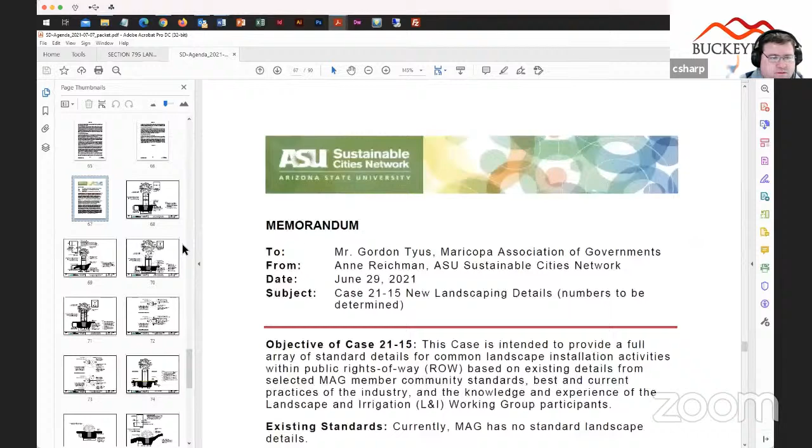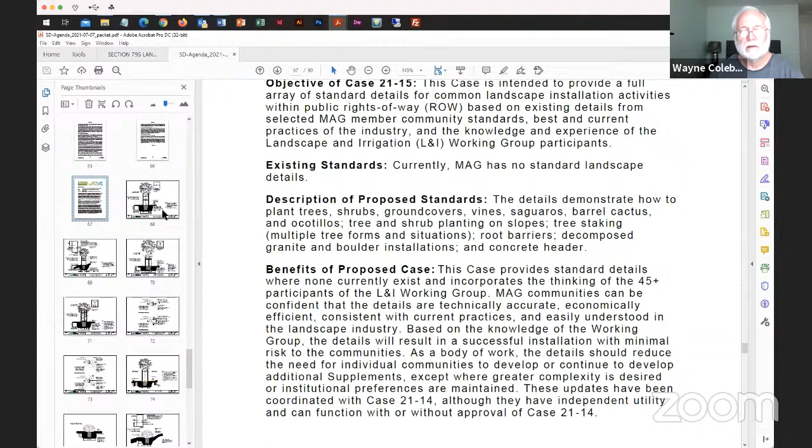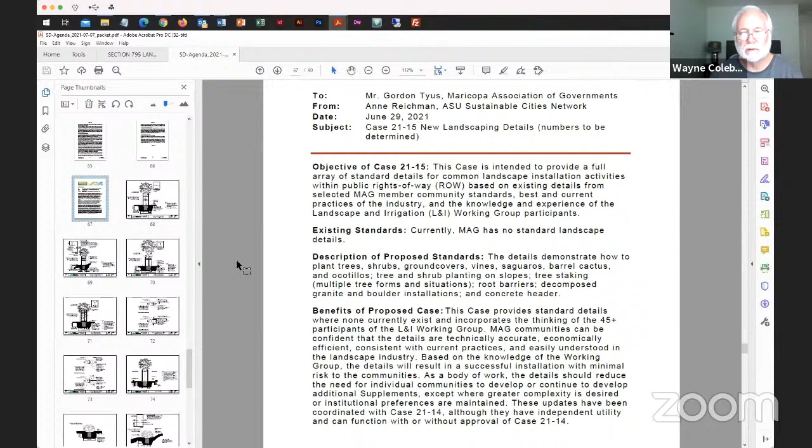So with that, I'm going to move on to 15, which I believe is basically part of the landscaping related specifications, the landscaping details. Gordon, if you can go down to the details. Wayne, I'm going to assume that this is basically the same thing here. These are submitted as separate cases, and they can be approved independently. The specs refer to the plans and the details, but there's not a specific reference to something on a detail. So they can be approved separately. It would be preferable to have them either both approved or not, but they can go separately if the committee wants to look at them that way. Okay.

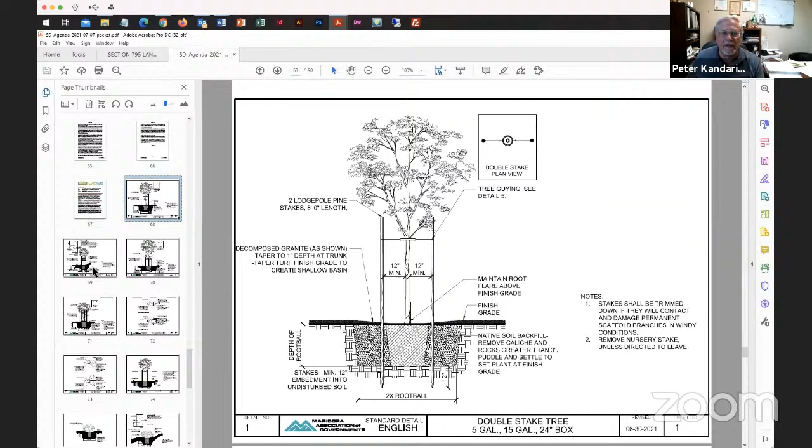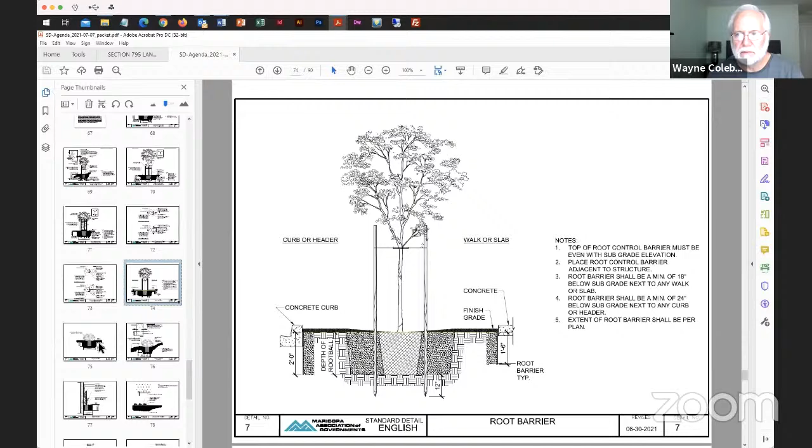There's a ton of work here. Yeah, and the details, if I remember right, the goal again was to look at existing supplements. This is not something that was just created out of whole cloth for the most part. There were existing supplements used by agencies where a lot of this came from. And Wayne, you may want to expand on that. Yeah, I will. Many of the details are based on the City of Tempe details. Not all of them, but many of them. And various members of us have gone through and reviewed them and feel like they are certainly adequate for the purposes of what we're doing.

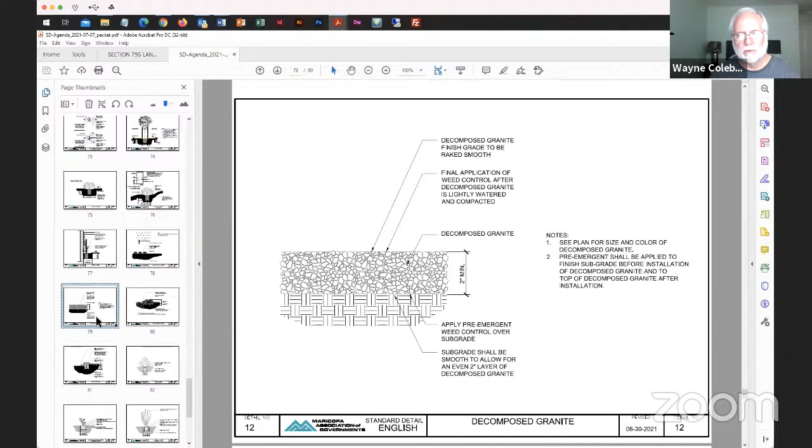Again, these are common activities. These are not something unique. You would see these on any landscape set of drawings pretty routinely. And we tried to utilize details that would be pretty straightforward for just about anybody to utilize. We've removed some of the stuff that's Tempe specific. And in other cases, we've tried to genericize some of the things on here to make them more applicable to a broader audience and a broader user group. And again, it introduces a challenge with the existing details because a number of agencies have added these types of landscaping details, and the current MAG really doesn't have a section for them. So that's a discussion that needs to be incorporated also with this.

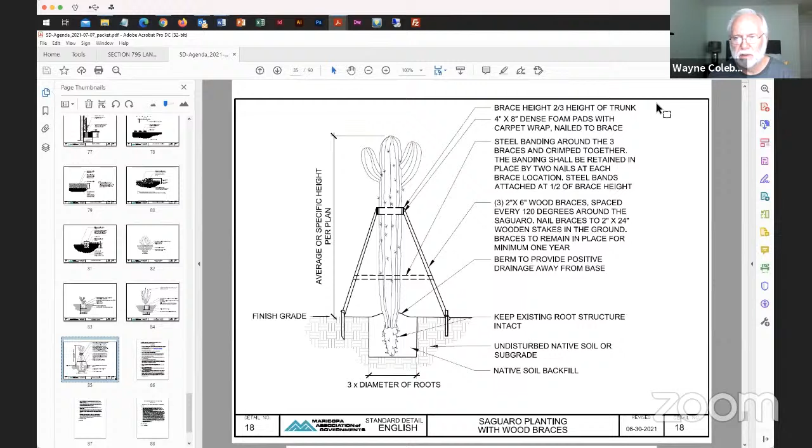Yes, many of the municipalities have their own details, Tempe, Chandler, Mesa, so this is one of those areas where you're probably not going to eliminate those supplements from the cities unless they decide to adopt these. But some of the other communities that don't have these, they would certainly function well for them. They're intended that way. Now, we did have, as part of the working group, a discussion about where these details would go in the standard details and what series number they might be, and things like that. But that's for a later discussion, I think.

Well, that we're kind of throwing back at the committee. Take a look at that and see. We didn't want to hold it up just for that reason, but I think that's one that's going to have to be addressed. If you look at the current details, I'm not sure they really fit terribly well, but their section number's still open. Well, in this submittal, they're numbered 1 through 18 or something, so that can be changed at any time. Yeah, we're kind of breaking new territory here, we thought.

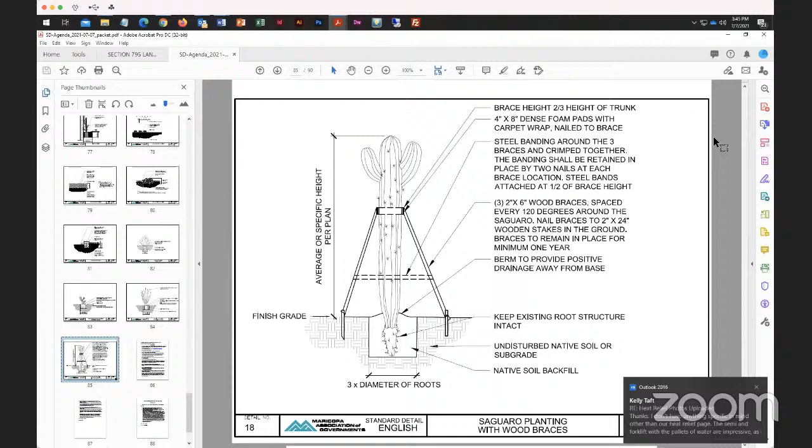I agree. I think we need to look at the big picture of what the future sections we may need in MAG. I know in Chandler it's Series 800 because we have traffic, street lights, and other things that we've broken out separately. But I think, yeah, maybe that'd be another general discussion in a MAG upcoming topic of what we think we might want to use future sections for.

And then be aware there's irrigation details that are going to come out also. This group took on such a huge chunk of work. There wasn't enough time to get to the MAG section upgrades. I mean, they've done a lot of work on it, but we needed to make the July date. And I did not want to, and I think we all agreed, we didn't want this to be held up because we didn't have it all done.

There's more work to be done in terms of irrigation. So think of it also that irrigation details are going to come out. Now, when I'm talking irrigation, we're talking landscape type irrigation. Yeah. Landscape irrigation. Yeah. So as this process moves forward, maybe there needs to be a landscape and irrigation detail section.

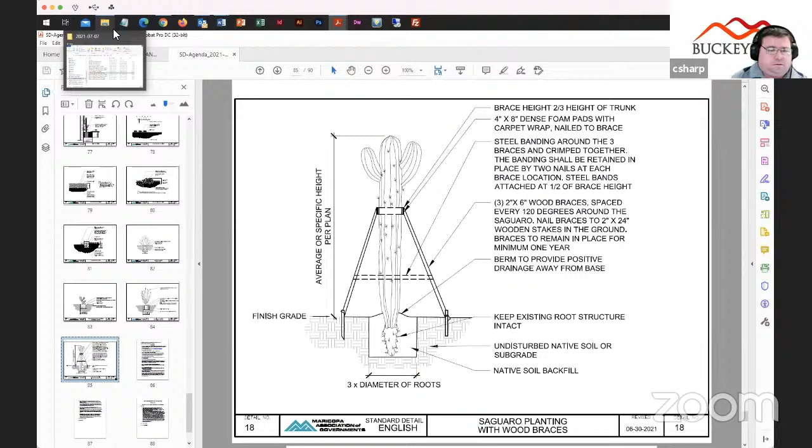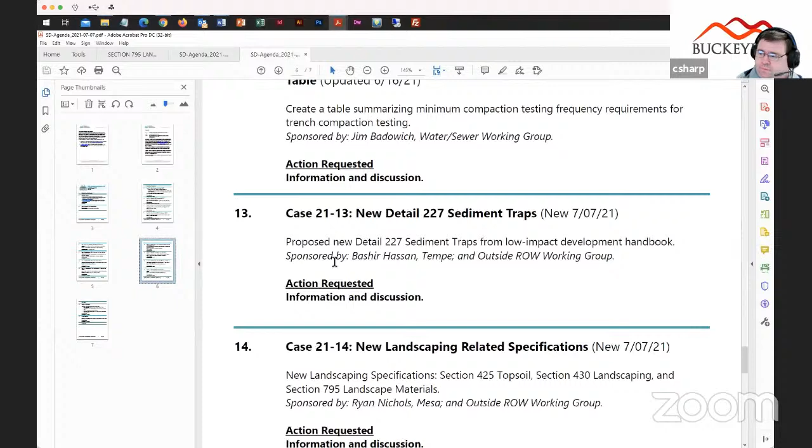Details look very good. Drafting looks great. Compliments. Yeah, there was a lot of work put into this, so you guys, very good work. Any other comments, questions, other than what we've discussed already? Not hearing any. I know a few people that I'm going to send this to because they'll be definitely interested in it. So, again, thank you, Ryan, your team, Zach, everybody.

And from that point, we will move on to item 16, working group reports. Water and sewer. Did I see an email, Gordon, that Jim had to leave? Yeah, Jim has already left. I think we're running pretty late already. So unless there's some important highlights that haven't already been mentioned, maybe we can breeze through these because the notes from all the past meetings are in the packet and people can review them. Okay. I know pretty much what we've discussed today is a lot of what we've talked about in the water and sewer working group, so we've touched on quite a bit.

From that point, I'm going to move on down to asphalt concrete. Greg, Brian, Jeff, you guys want to touch on yours a little bit? We've covered what was in the packet, and there will be no materials working group this month. There's no real reason for us to hold anything, so there won't be one this month. Okay. Thank you, Jeff.

And outside of right of way, Peter, I know we just covered a ton of ground. Yeah, we monopolized your time on this, and I don't think we need to cover it other than mentioning our next meeting is on the 22nd. We're continuing to move forward with this and some other details, planning for next year's work, and then we've got the cleanup on the existing. Okay, well, like I said before, excellent work on all this stuff, so thank you very much.

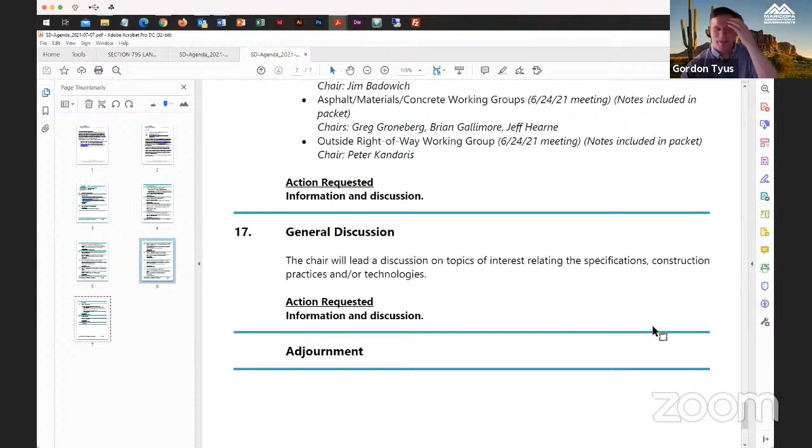From there, moving on to item number 17, general discussion. I don't have anything. Well, actually, I do. I talked with, I'm trying to remember the guy's name, Gordon, maybe you can help me out, with the state on revising. He just slipped my mind. Yeah, it's slipping my mind too. I know who you're talking about. Is it Dan?

Anyways, on revising the AAC, the extra protection requirements, the email basically said that it's still been tabled. It didn't go into detail, but I'm assuming it's still pandemic related. But they have not taken that up anymore. So I'll keep on it and see if I can keep getting more information and see when they finally decide to get that up and running. But there's been no more information. It's bothering me, I can't remember his name now. Other than that, I don't have anything.